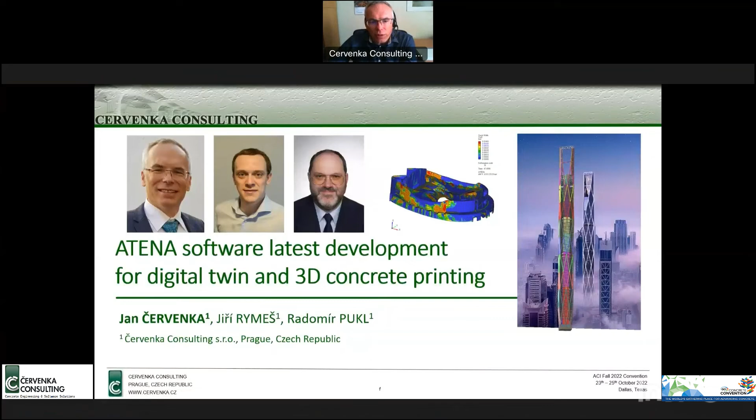For those not familiar with our company, let me give a few introductory words about what we do. We develop technology and software for nonlinear simulation, advanced modeling and simulation of concrete and reinforced concrete structures, as summarized by the example applications on this slide. On top, you can see our motto: test your structure before you build it.

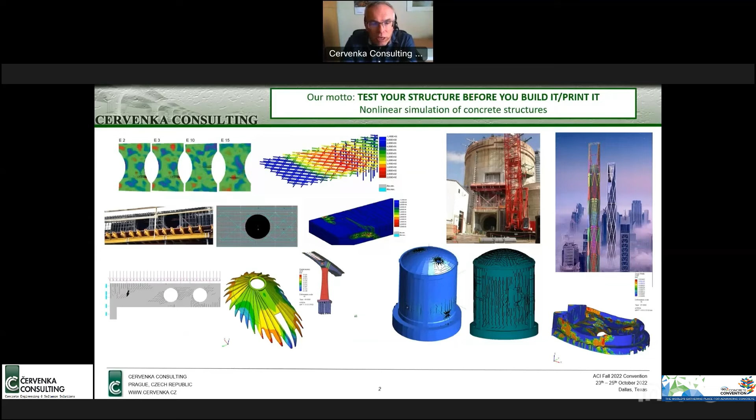Nowadays, we also have the expanding 3D printing industry for concrete, so we are expanding this motto to test your structure before you print it. I will come to that later in my presentation, where I will show some advances in our technology for the application of 3D printing of concrete.

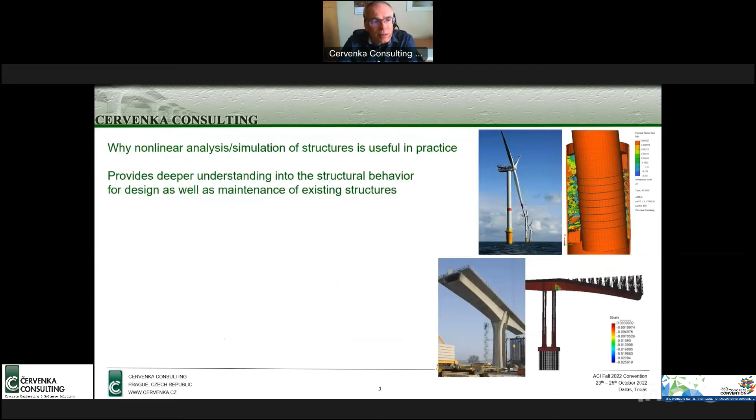So why is nonlinear simulation of structures useful in practice? We have various advanced structures where it is advantageous to make more advanced modeling and simulation. One of the biggest advantages we can obtain from nonlinear analysis is that it can provide a deeper understanding of the structural behavior, for design as well as maintenance of existing structures.

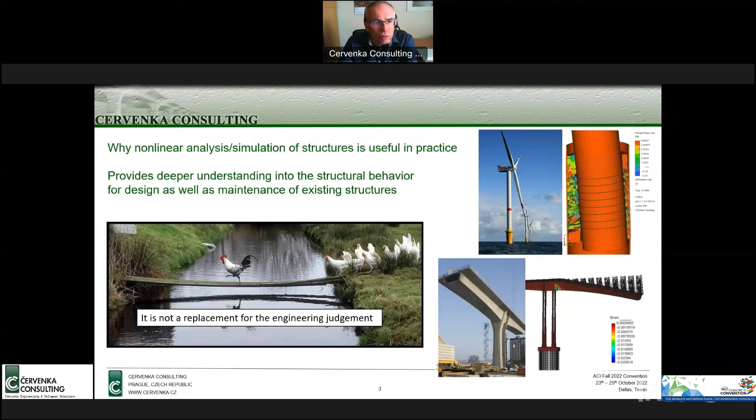This slide should emphasize that, of course, expert judgment and basic engineering knowledge is still essential, and nonlinear analysis should not be understood as a method or tool to replace that.

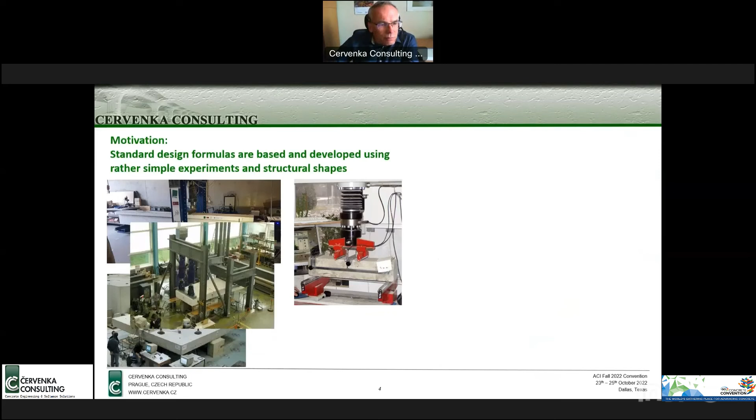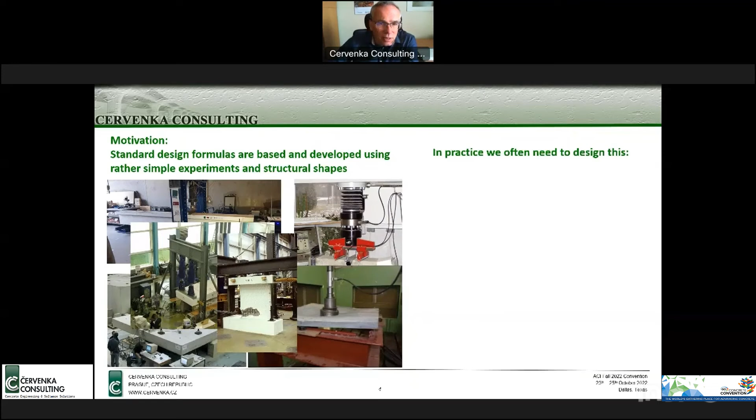However, we have to understand that most of the formulas which we use in design are quite empirical and are based on laboratory experiments. Typically, we use experiments of beams, slabs, some bigger slabs or small plates or walls, and based on that we develop formulas which are often empirical, and we try to use them to design quite complex situations nowadays, like various steel pieces embedded into concrete.

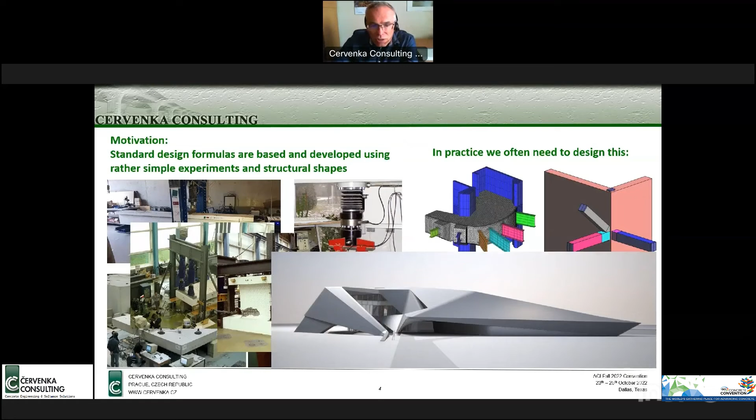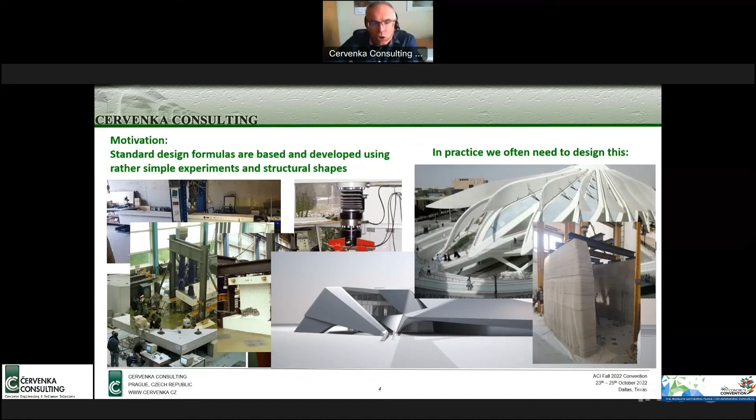Or some very fancy architectural shapes, and nowadays we have the technology of 3D printing, where of course the standard methods are very difficult to apply. So this is where nonlinear analysis is an excellent tool to supplement and enhance our classical methods.

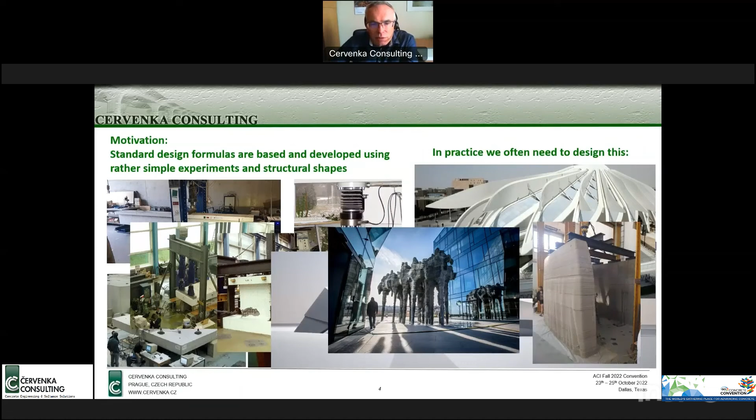A little bit about the background of the technology we are using. Our software is based on the finite element method. That means our structure is divided into small pieces, typically rectangular or brick shape or triangular, and inside we have some mathematical model of this finite element.

Inside this finite element, we typically evaluate the strains and stresses at integration points. So inside these integration points, traditionally we use linear material models, but we can also use nonlinear models, taking into account cracking, crushing, or reinforcement yielding.

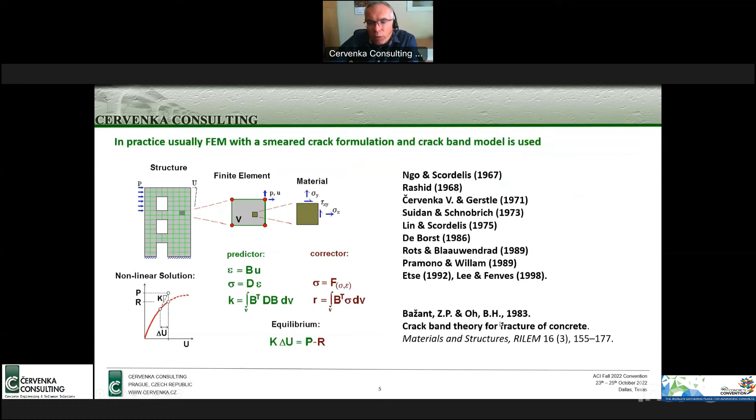All this development goes back quite a long time to the work of Ngo and Scordelis, Rashid, Červenka, and so on. For the nonlinear behavior, currently we are using the crack band theory, which was first proposed by Bazant et al. in 1983.

A very brief summary of the material models: the material model in our ATENA software is a fracture plastic model. By that I mean we are using a Rankine fracture mechanics based model to simulate concrete cracking.

And in compression, the compressive behavior and compressive crushing is controlled by a plasticity-based model, which consists of hardening and softening. Like in tension, also in compression, we take into account energy dissipation by using an analogical model to the crack band model.

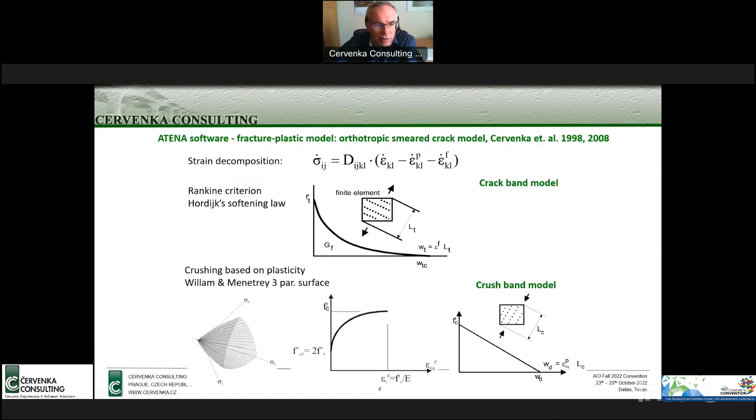Now we can call it the crush band model. With this, we can also take into account the size effect, the fact that large structures tend to be more brittle than small structures.

It is very essential to validate these models, and the best method for validation is participation in various blind predictions.

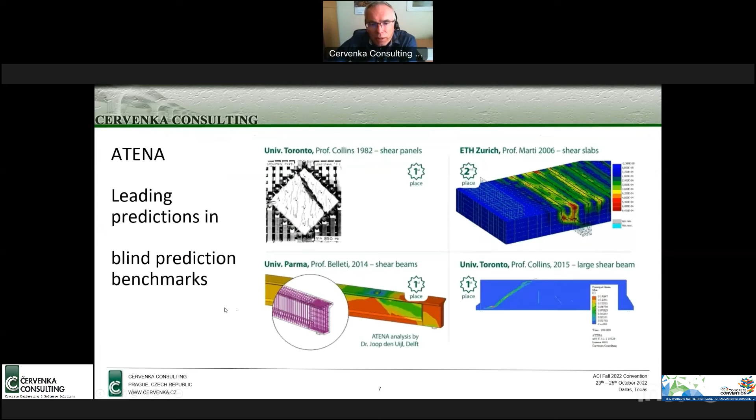I'm showing a few blind competitions where we participated, and usually we were quite successful in our methods and models, always providing accurate results with good predictive accuracy.

Let me mention some of these blind competitions, more recent ones. One is from 2015, the famous Toronto beam, a very large beam. I won't spend too much detail on this since it's quite famous.

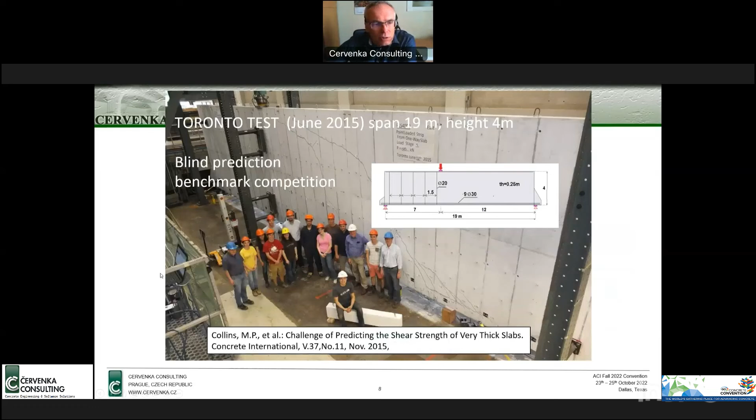Let me briefly show some simulation results of a nonlinear simulation and how it can predict well the cracking pattern and also the load carrying capacity.

The experimental result was 685 kilonewtons. ATENA predicted 745, about 9% above the experimental value, but with a very good prediction of the crack pattern.

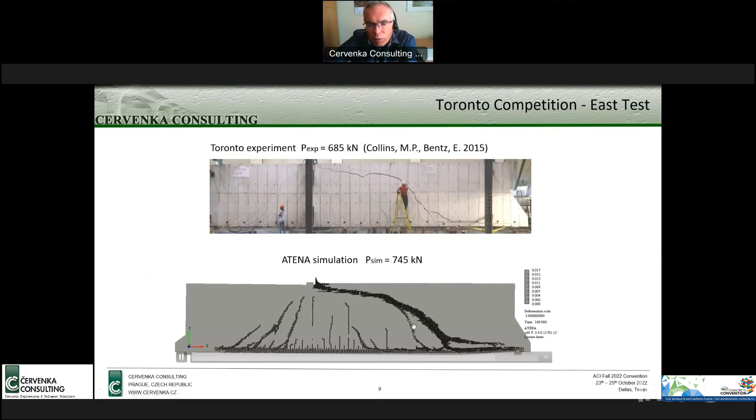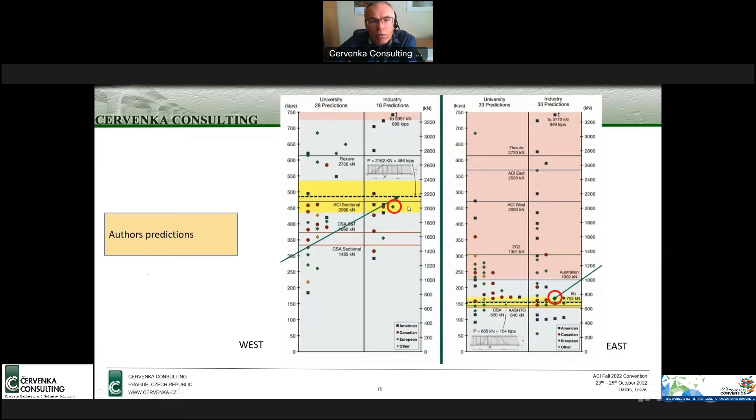Here I showed the two results. There were actually two experiments, one unreinforced, which I showed you before, and one with reinforcement. These circles indicate our results, and you can see in both cases we were in this yellow area of 10% accuracy.

So we were announced as winners for this competition. Let me continue with another competition, a more recent one from 2021. This time, a very similar beam was tested at University of California at Berkeley.

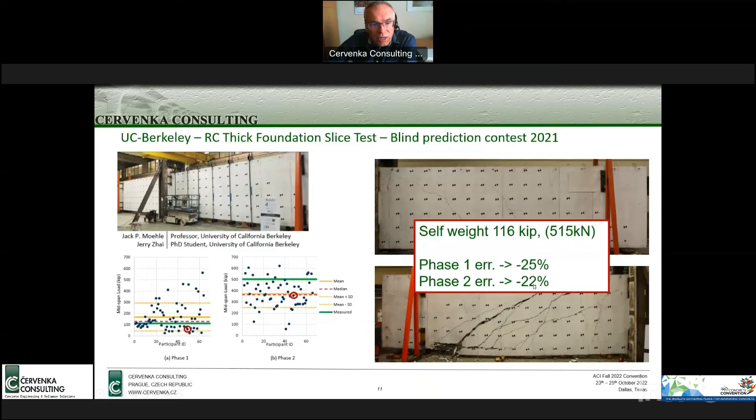This is always a good opportunity to learn. Let me summarize: here is the Toronto test from 2015, where we had a very good prediction and were the winners.

And these are our results from the Berkeley experiment in 2021, where our results were not so good. One reason, which we evaluated and learned from afterwards, was that we wanted to be on the conservative side in our predictions.

So we took into account quite significantly the shrinkage effect, and this greatly reduced our predicted load carrying capacity. This is something we learned: in these experiments, the contribution from shrinkage to the cracking was not so significant.

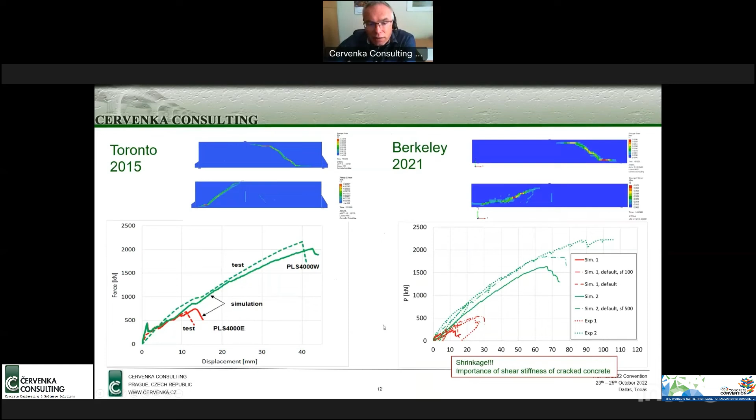Another important parameter in this nonlinear analysis is the shear stiffness of the cracked concrete, which is not something we know, so we always have to estimate it. This estimation is very important, and if made incorrectly, you may, like in this case, underpredict the real strength.

Another example, another blind prediction, also very nice, also from Berkeley. This time it was columns under cyclic loading. An important result we were required to predict was the ductility.

This shows the scatter of results from all participants. Our prediction was here, so we were really very much on target with the ductility capacity.

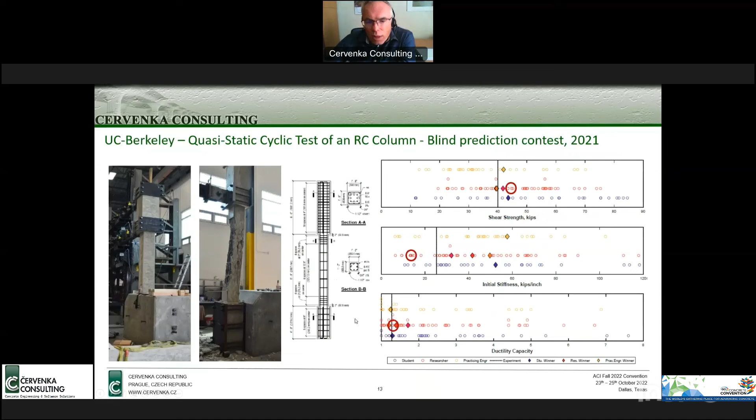Let me just show some results from the cyclic animation, so that we can relax ourselves a little bit from all these equations. Here you see the simulation, you see the crack opening and closing.

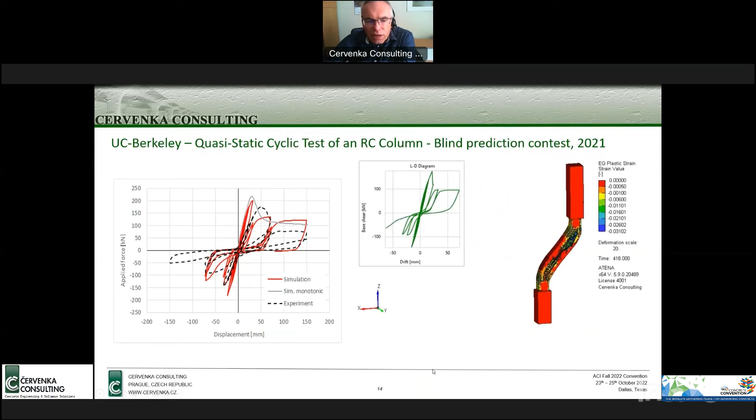Very important in this column was the development of a shear crack in the middle section, because the middle section was built with lower shear reinforcement than the end section. That's why the final failure mode was mainly governed by the development of the shear crack in the middle section. Overall, these blind predictions show that our technology is quite reliable and has real predictive capabilities for structural behavior.

Now I would like to spend the second part of my presentation showing you the latest developments in ATENA software. One major development is that we've created a totally new user environment for our software. We call it ATENA 2023, and we expect to release the final commercial version at the beginning of next year. Here you can see some first glimpses of the user environment, which will be based on a native BIM model behind the software.

Another interesting possibility is full support of Python scripting to help users in their modeling work.

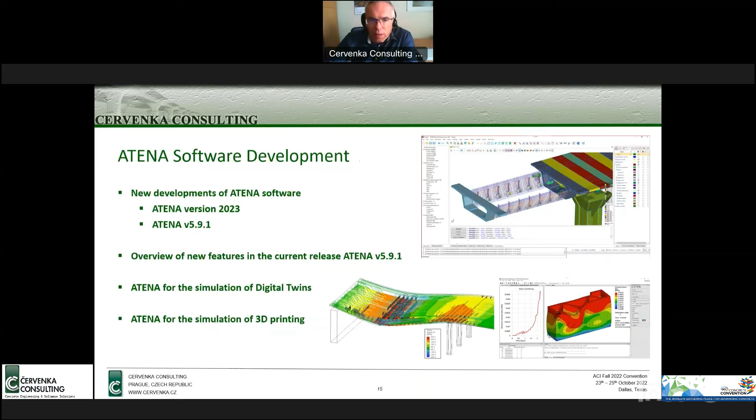Let me briefly summarize the new features in this new version 5.9.1, which we are releasing right now. This is really an incremental update. If I want to emphasize some of the new things, a very interesting one is new licensing options which allow a very easy trial version, so you can download the software and almost immediately evaluate it for 30 days.

Then in the program itself, we have new creep models for the ACI and Canadian codes. We have some bond models improved and modified to simulate aging and deterioration based on time, temperature, or corrosion.

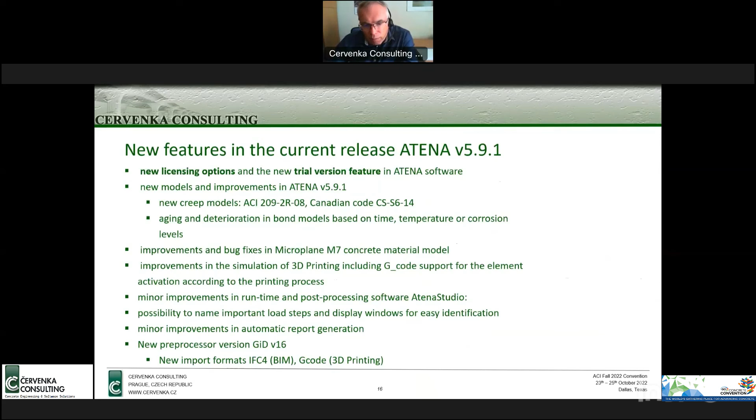There are various minor improvements in post-processing, and in pre-processing we are using a new preprocessor version, GiD version 16. Interesting there, it supports new import formats like IFC4, the Building Information Model format. And for 3D printing simulation, an interesting feature is support for G-code, which simplifies model preparation and execution for simulating 3D printing.

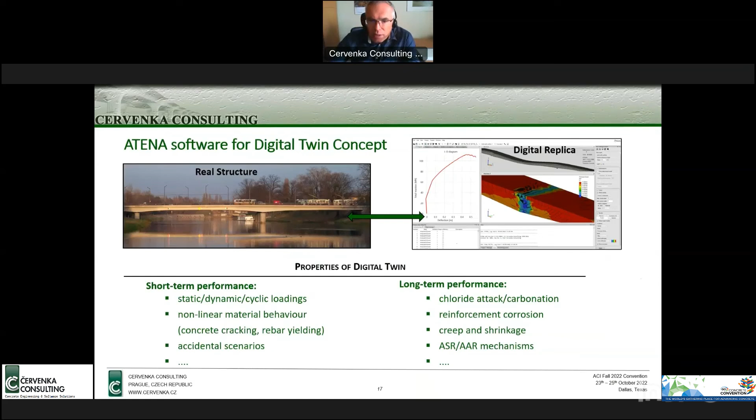So let me go now to the digital twin concept, where we are using ATENA more and more often nowadays. I would like to show two examples. One is in the Czech Republic, a pre-stressed concrete bridge, a box girder bridge. The second one is a bridge in Germany, which is a reinforced concrete bridge.

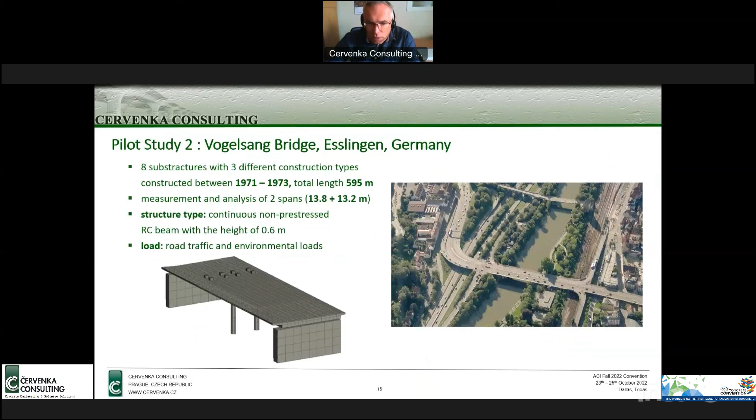So what is this digital twin concept? It means there is a close connection and calibration of the numerical, or virtual, model through close cooperation with monitoring. In these examples, we were using a monitoring system which allows us to evaluate the real loads on the bridge.

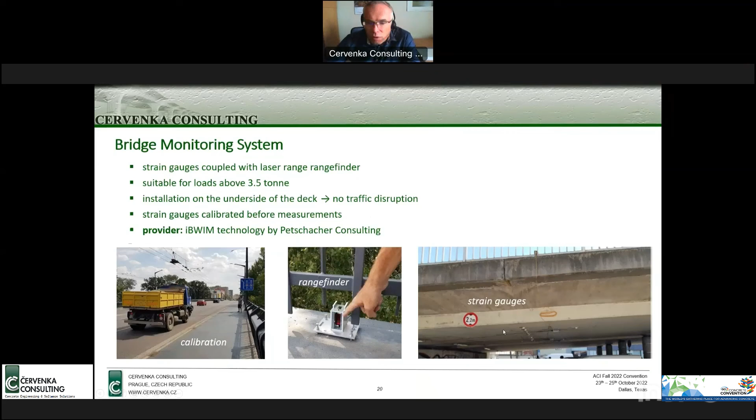Of course, some calibration is required using predefined trucks with predefined weight, but there is a rangefinder which can find the speed of the cars and the number of axles the vehicles have. And, of course, some strain gauges need to be installed. It's a very easy system to install, it can be installed in about 2 hours, and it can provide very interesting results.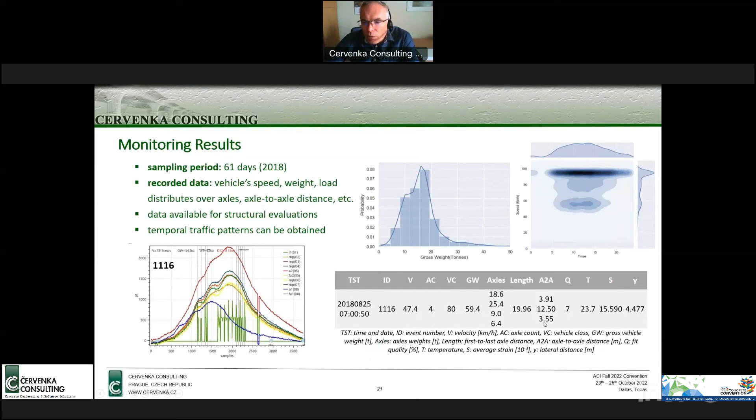And so we can obtain these kind of results, like for instance in time we can see the probability of various vehicles with a certain weight, or we can also evaluate the speed or typical speed of the vehicles throughout the day. And for each vehicle we obtain this kind of information, which shows the weight of the vehicle, the number of axles, the length of the vehicle, speed of the vehicle, and so on.

This is then used to perform the calibration of the numerical model. And with the numerical model, what we typically then perform is a durability analysis also. So we calibrate the model based on these experimental data in close cooperation with the monitoring, but then we use it for the life or long-term predictions.

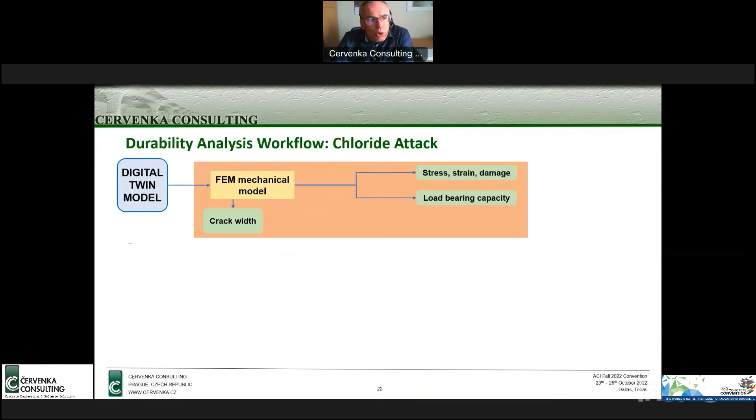For that, we also need to take into account the durability. That means, for instance, corrosion and creep and shrinkage and so on. So for the durability model, we have a model where we combine the mechanical model with a chemomechanical model, which considers first the diffusion of chlorides and then reinforcement corrosion.

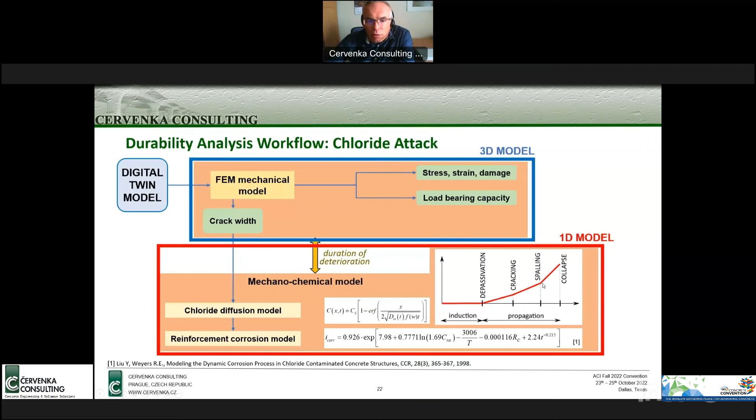This model, main features of the model, consider basically the increase of corrosion depending on these typical situations. First, when the chloride concentration, critical chloride concentration is reached at the reinforcement depth, that's when corrosion starts. And when cracking of the cover and spalling of the cover, these points indicate a change of the corrosion rate. So all this can be taken into account, schematically it is shown on this graph.

So if you think about some structure with the reinforcement model inside, this is what we have in our ATENA model. There is a discrete model also of reinforcement. So for each reinforcement, we know the distance of the reinforcement from the surface which is subjected to some chlorides propagation or carbonation.

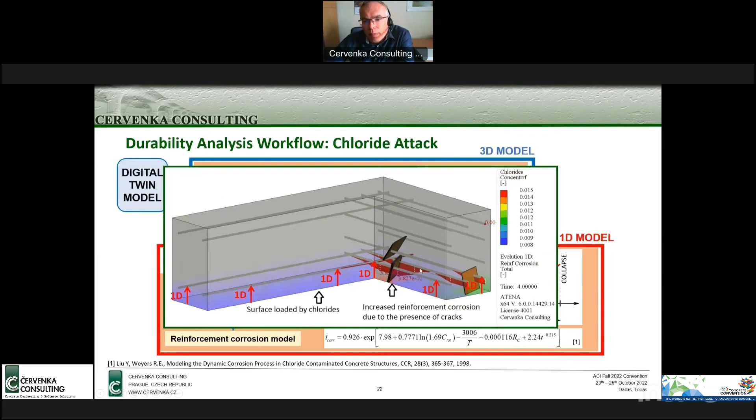And we can then use just a one-dimensional model to simulate the chloride propagation, also taking into account the possible presence of cracks. As you can see here, at the location of the crack, we have a much higher corrosion rate, as is indicated by these red zones. So with this model, we can have quite accurate predictions of the long-term behavior or long-term reliability.

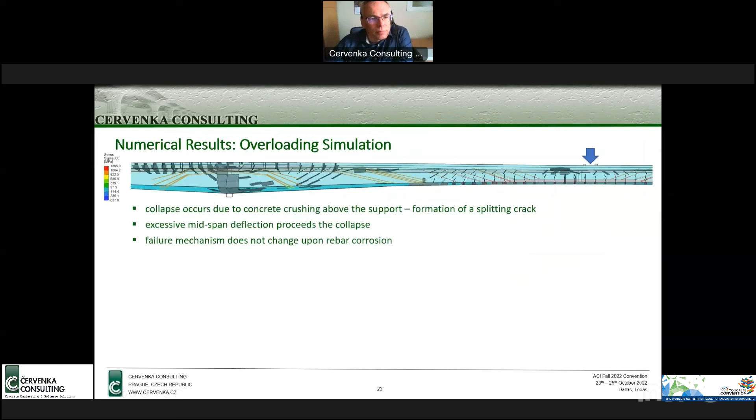So let me show some results for the first bridge, which was this pre-stressed reinforced concrete bridge. This shows kind of a transparent view of the bridge with the pre-stressing tendons inside, and also the crack development at the point of collapse during the simulation. Here you also see this typical overloading curve, kind of a pushover curve if you think about it, and then the development of a shear failure close to the support.

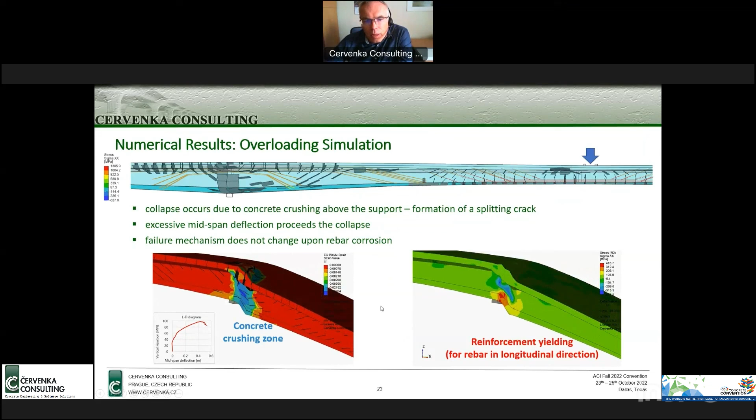So what happens is that we can perform such an overloading analysis, which was demonstrated before, kind of a pushover analysis, for different times. So we consider the chloride propagation, corrosion development, and then we can obtain such a pushover curve at different times. And from this, we can calculate the load carrying capacity of the bridge as it evolves in time.

So of course, we need to consider some probabilities. In this analysis, we use the model from the FIB model code, where we performed one analysis with mean properties, one analysis with characteristic properties, and based on that calculated the design load. And from this, you can see that the strength of the bridge is sufficient to survive for almost 150 years.

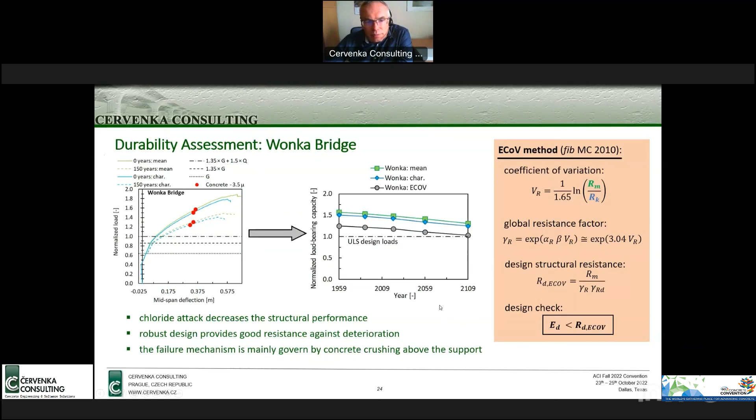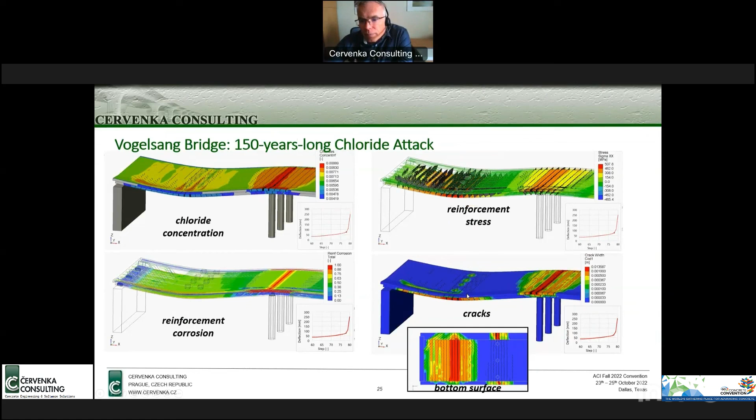With this approach, we can make similar analysis like before. That means we consider the chloride propagation for a certain time period, and at the end of the time period, we always subject the structure to some overloading by the design loads. In this way, we can predict the load carrying capacity at different times.

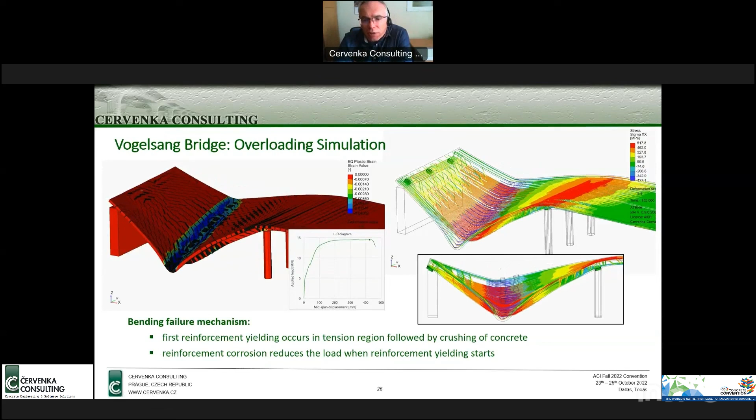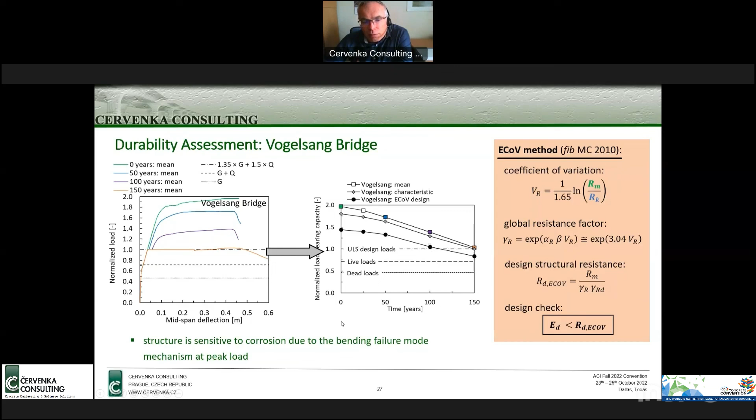We can have a similar figure like before, where we plot the strength of the structure over time. Here we can see that at about 100 years, there is not enough safety anymore, and the bridge would have to be retrofitted or taken out of service.

If I look at the two bridges, you can nicely see the same normalized load carrying capacity curve in time. It is interesting to observe that, because of different designs, both bridges have different sensitivity to long-term effects. The reinforced concrete bridge is much more sensitive, with a steeper degradation due to corrosion. That's because the pre-stressing tendons are hidden much deeper inside the bridge walls, so it takes much longer for the corrosion to start and proceed and cause significant damage.

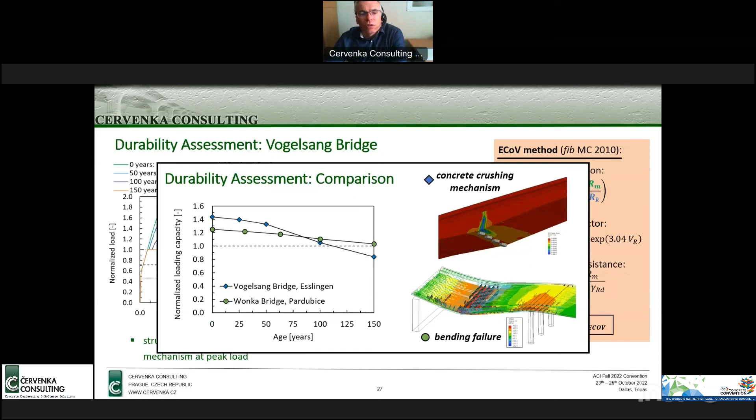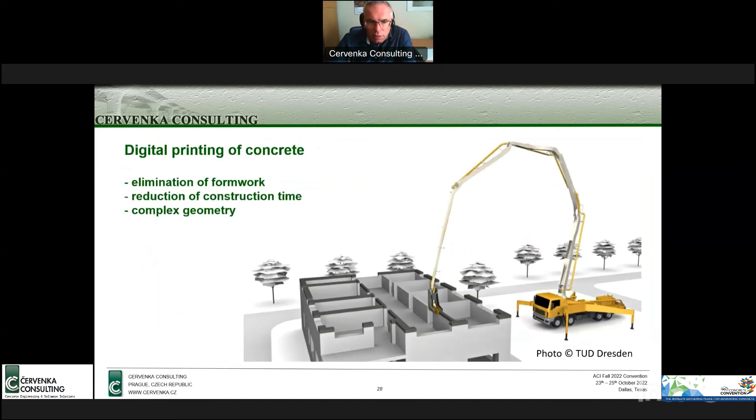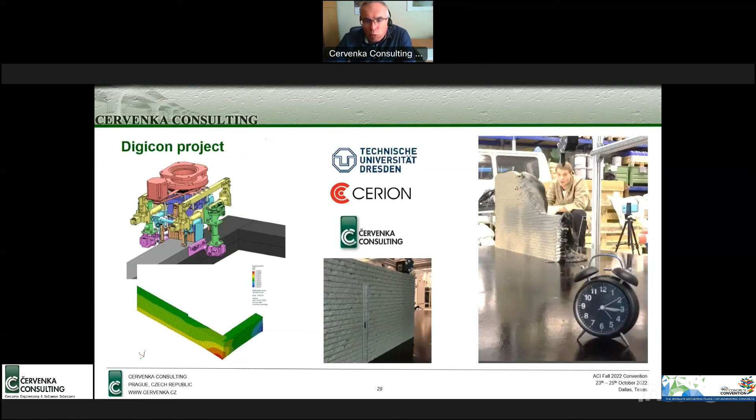The last example or development on our software I want to show is the simulation of digital printing of concrete. This summarizes the results of a previous project, Digicon, together with a German university in Dresden, where a special head for 3D printing was developed. An interesting feature of this printing head was that it could print smooth wall sides as well as sharp corners.

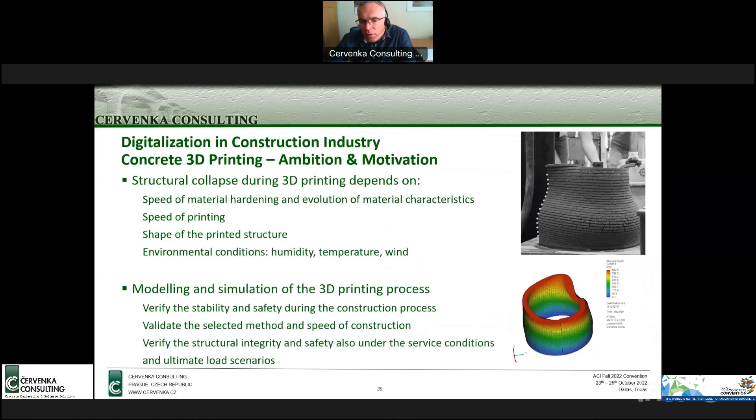Why would simulation be useful for 3D printing? I would say the best application is to prevent collapse, because nowadays it often happens that during printing we see a collapse of the 3D printed object. Of course, nowadays it doesn't matter that much because typically very small structures or objects are being printed. But in the future, if we start using this technology for more complex structures, we cannot waste material by having a collapse that may even cause damage or injuries.

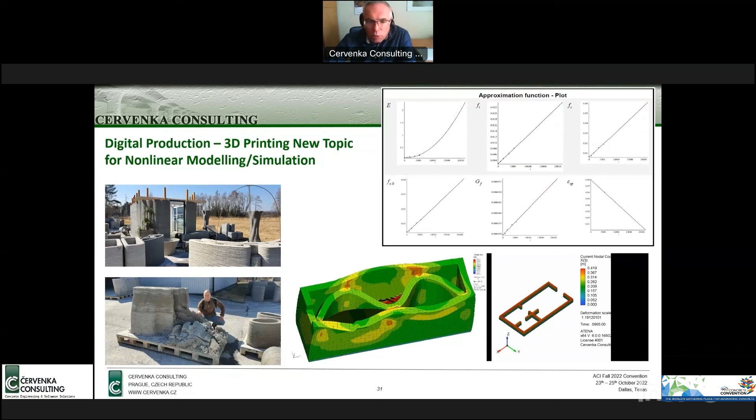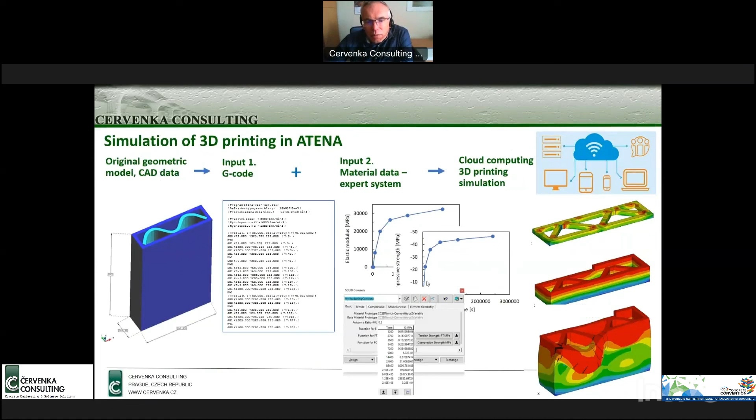This is the current situation, and we can apply nonlinear simulation with advantage there to verify. For that, we have developed new technology where an important input is the G-code, which is the code used to run the machine for 3D printing. Considering the time-dependent material parameters, we can really simulate the behavior.